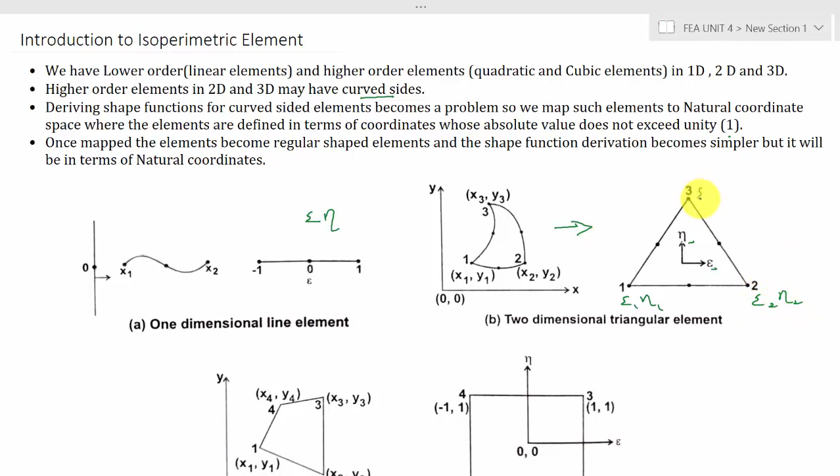This is actually my curved surface, that is the isoparametric surface. I have converted this Cartesian coordinate system into a natural coordinate system, so your lines will be straight lines, but here the coordinates are eta and nu. So this is eta1, nu1, this is eta2, nu2, and this is eta3 and nu3, not x and y system.

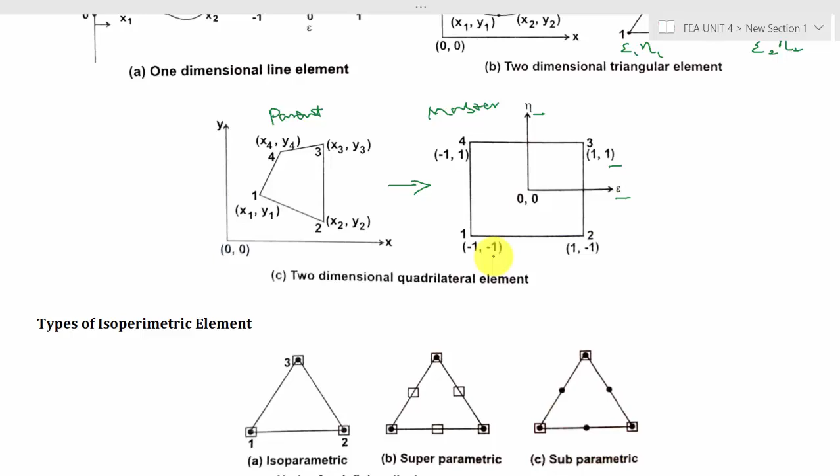Similarly for the two-dimensional quadrilateral element, this is the Cartesian coordinate system, or the parent element, and I am converting the parent element into a master element in natural coordinates eta and nu. You can see that the maximum value will be +1 and the minimum value will be -1. So this is called isoparametric formulation.

There are three types of isoparametric elements: one is isoparametric, the second one is superparametric, and the third one is subparametric.

In isoparametric, the shape functions are used to identify both the displacements as well as geometry. In previous elements, we used the shape function to identify the displacement alone, but in isoparametric element, the shape function identifies both displacement and geometry. So the nodes for defining the displacement is equal to the nodes for defining the geometry.

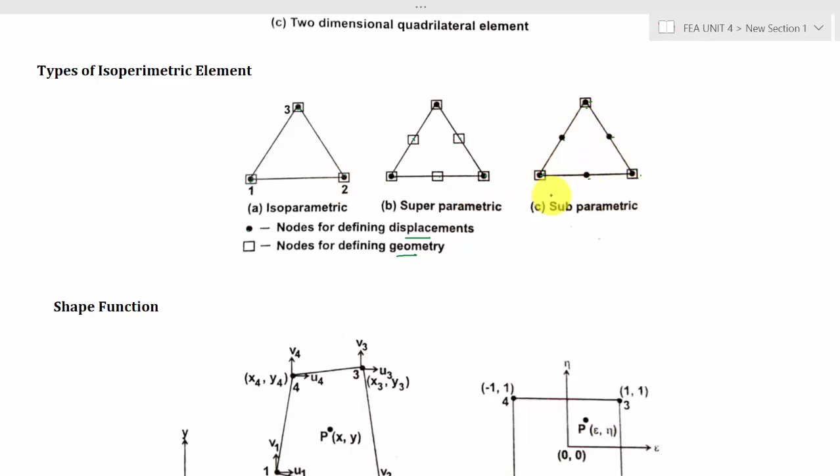In superparametric, the nodes for defining the geometry is greater than the nodes for defining the displacement. The dot is a node for defining displacement, and the square is a node for defining geometry. When you go for subparametric, we have 3 nodes for defining the geometry, and 6 nodes for defining the displacement. So this is the difference between the three isoparametric elements.

Now coming to the shape function, here I have considered a general quadrilateral element, that is my parent element. I am converting the parent element into a master element, that is the isoparametric quadrilateral element in natural coordinates eta and nu. So here these are all my shape functions. Since I have 4 nodes, I will have 4 shape functions.

N1 is equal to 1 by 4, 1 minus eta, 1 minus nu. At node 1, the eta value and nu value will be -1, that is why you have minus and minus here. At node 2, eta is +1 and nu is -1, so eta is plus and nu is minus. At node 3, both eta and nu values will be positive. At node 4, eta is negative and nu is positive. So these are all the 4 shape functions.

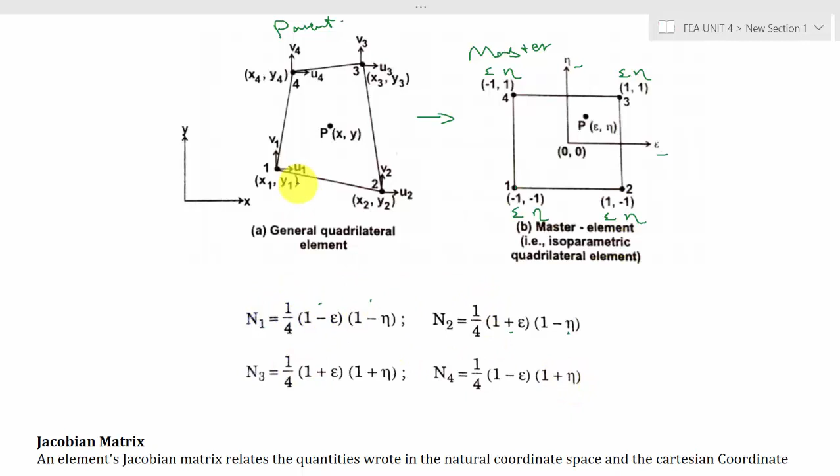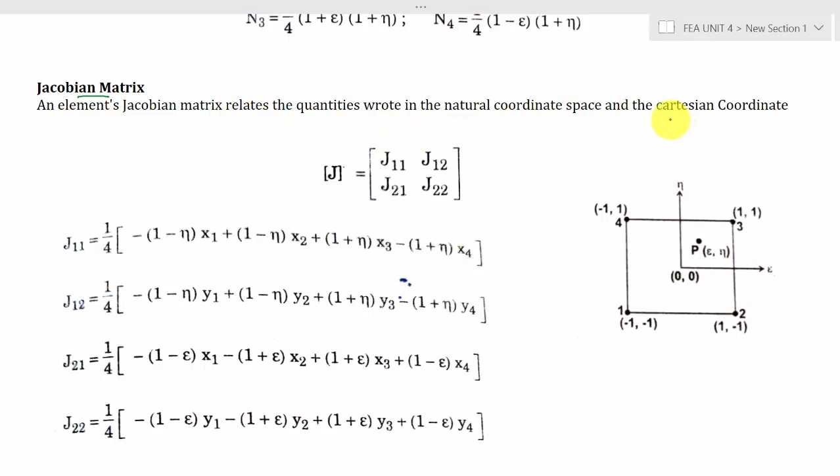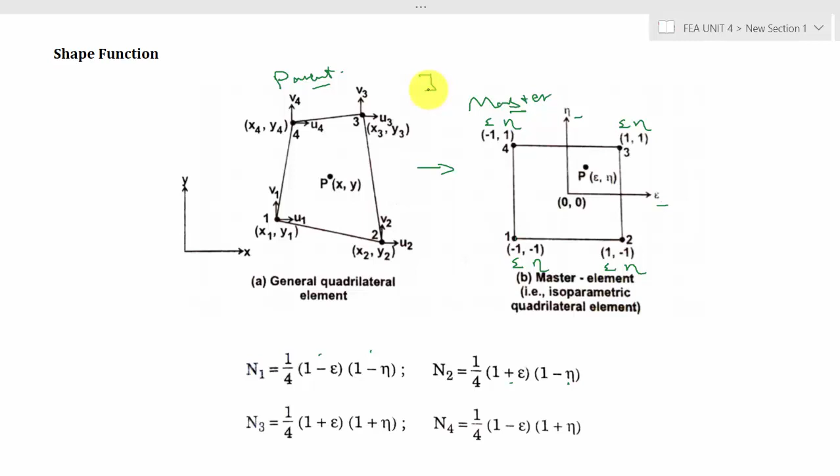Then the next matrix is the Jacobian matrix. This is a new term. The Jacobian matrix relates the natural coordinate system with the Cartesian coordinate system. It gives the relationship between the master element and the parent element. So J is the relationship between these two elements.

The equation for the J matrix is J11, J12, J21, J22. Here is the equation: it is 1 by 4 times minus 1 minus nu times x1, plus 1 minus nu times x2, 1 plus nu times x3, 1 plus nu times x4. So J11 and J12 will be in nu, J21 and J22 will be in eta.

Here also you can use the same principle. At node 1, eta and nu both are minus, so you move from 1, 2, 3, 4. Node 1 is minus minus, node 2 is plus minus, node 3 is plus plus, node 4 is minus plus.

Then J11 can be replaced by J12 if you replace x with y in the same equation. Then when you go for J21, you have to move in the opposite direction. For J11 we moved from 1, 2, 3, 4, that is the counterclockwise direction. Here you have to move in the clockwise direction, so it is minus minus, then minus plus.

Here you can see it is minus plus, then plus plus, then again plus minus. Here it is x, here it is y, write it in the anti-clockwise direction, clockwise direction. If it is x, then it is J21, if it is y, then it is J22. So this is how you can remember the Jacobian matrix equation.

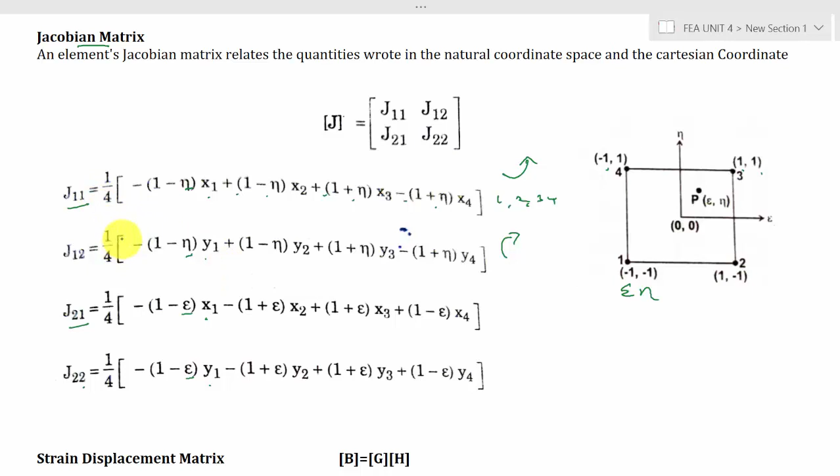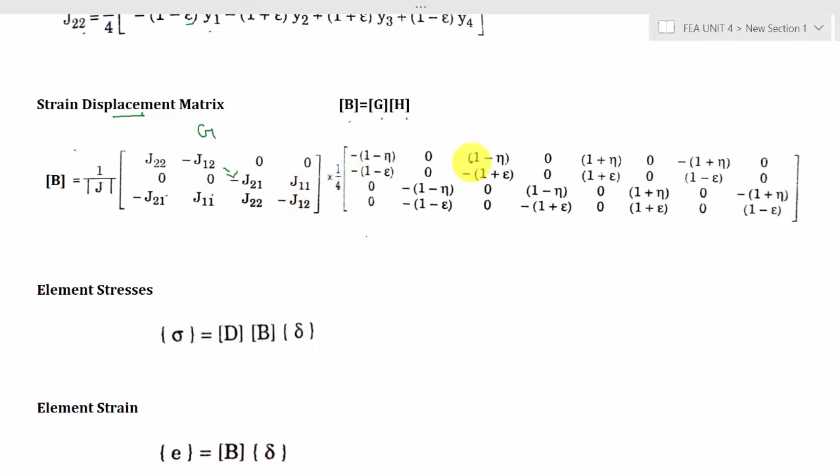Then the next matrix is strain displacement matrix. B is equal to G into H. The G is, this is the G matrix. It is 1 by modulus of J, J22 minus J12, 0, 0, 0, 0, minus J21, J11. Then write it here J21, J11, then J22 and minus J12. And here into 1 by 4, this is actually your Jacobian matrix. It is almost like your Jacobian matrix.

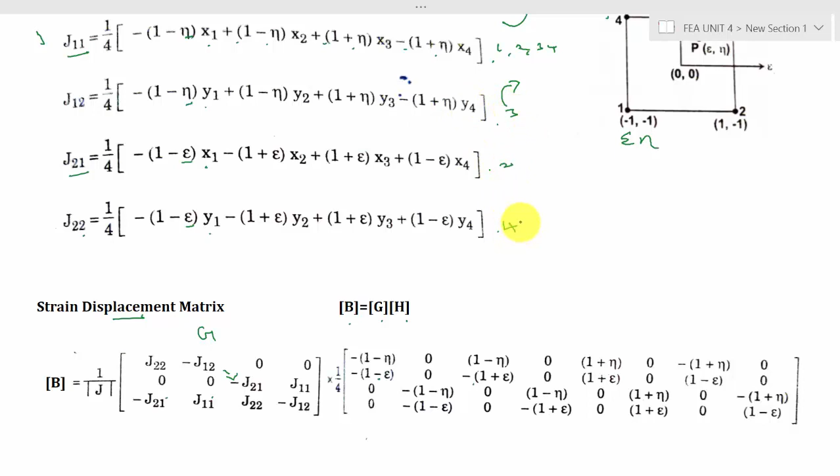You can see that minus 1 minus eta 0, then 1 minus eta 0, then 1 plus eta 0, minus 1 plus eta 0. First row, then second row, third row and fourth row. So this is how you can remember this B matrix equation.

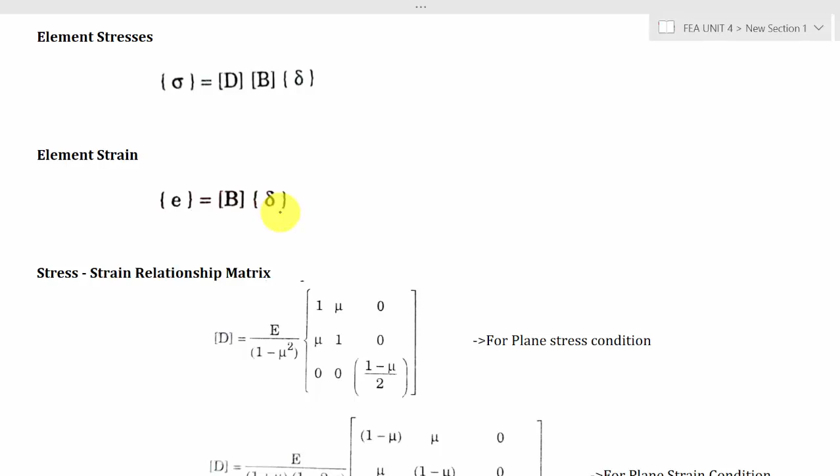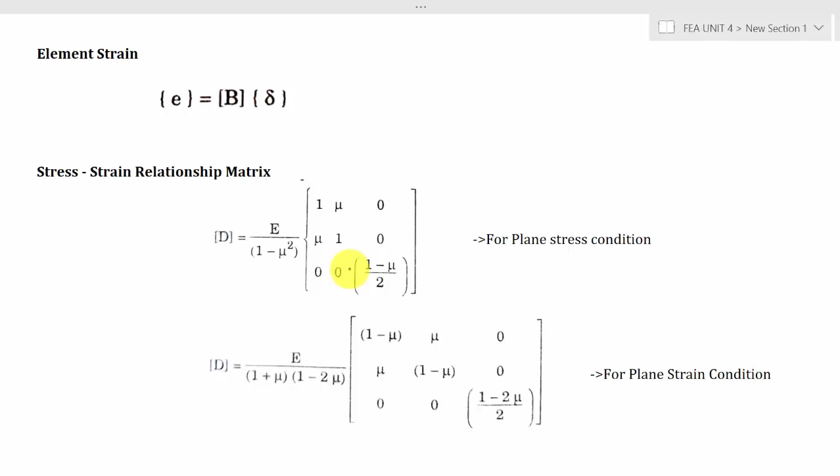Then the element stress equation is common. Sigma is equal to dB into del. For element strain it is E is equal to B into del. So for the D matrix we have two conditions: one is plane stress condition as well as plane strain condition. This equation is same for all, like the CST element. You can refer that. Here E is the Young's modulus and mu is the Poisson ratio.

So mostly in the problems they will ask you to calculate the Jacobian matrix, strain displacement matrix, or sometimes they may ask you to calculate the sigma and E. So this is my first problem.

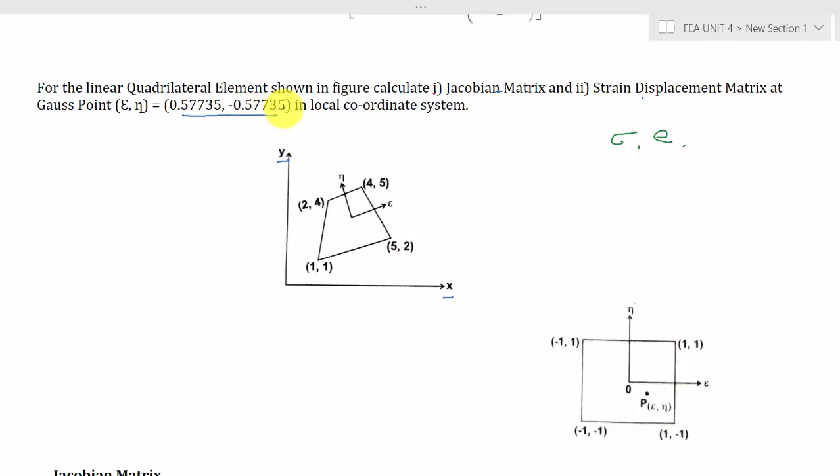For the linear quadrilateral element shown in figure, calculate Jacobian matrix, strain displacement matrix at Gauss point. So actually here the element is given in x and y, that is Cartesian coordinate system. But we have to find out the Jacobian matrix and strain displacement matrix at the Gauss point, that is epsilon is 0.57735 and eta is minus 0.57735. So here I have converted this into my natural coordinate system with epsilon is 0.577 something and eta is minus 0.57735.

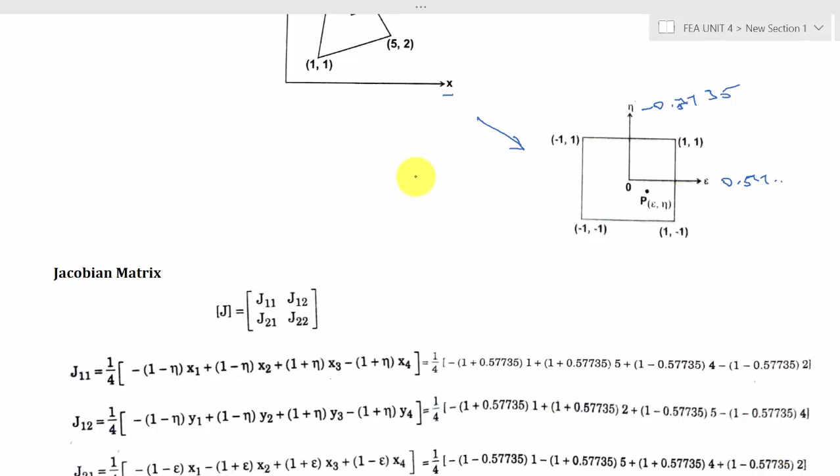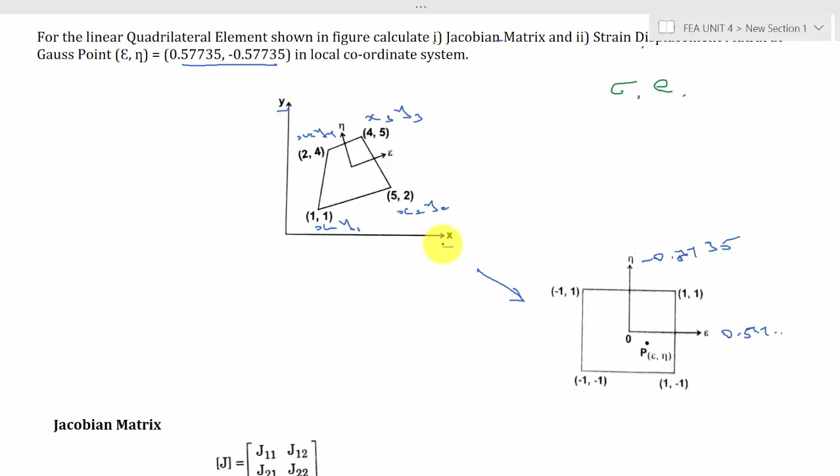So first we'll calculate the Jacobian matrix. The equation for Jacobian matrix is J11, J12, J21 and J22. So now I have written the equations. Here epsilon we know, eta we know, x1, x2 is given in the problem. So here it is x1, y1, x2, y2, x3, y3 and x4, y4, because it is given in the Cartesian coordinates. So you can substitute it.

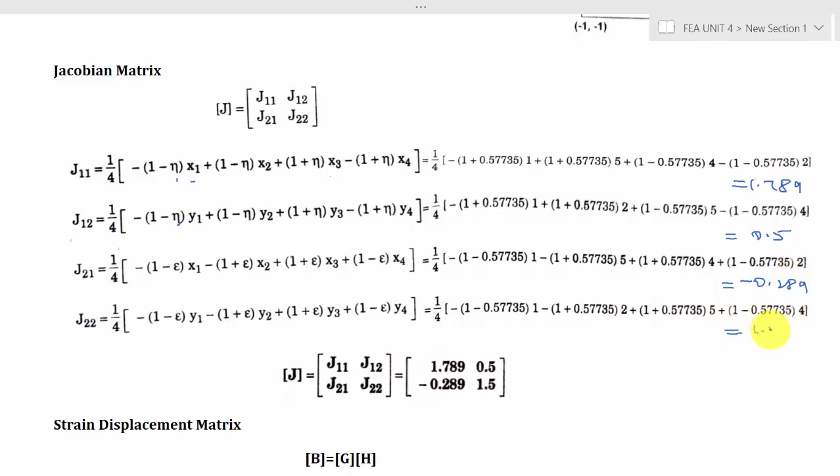So the value for J11 is 1.789, and for J12 it is 0.5. For J21 it is minus 0.289, and J22 is 1.5. So this is my Jacobian matrix.

The next one is strain displacement matrix. B is equal to G into H. So this is the G equation. Here modulus of J is there. So I have already calculated the J value. You can use the determinant of J in your calculator and find out the J value. And also we have the values for J11, J12, J21 and J22. So you can substitute everything here.

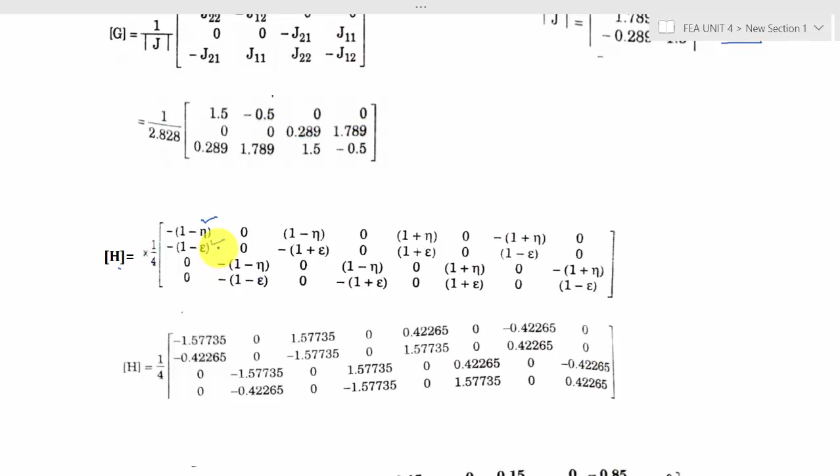And this is the H. So we know the formula. You can substitute the value of epsilon and the value of eta. Once after calculating the G matrix and H matrix, you can multiply them together because we know that B is equal to G into H. So we have the G matrix and we have the H matrix. You can multiply it and find out the B matrix, that is strain displacement matrix.

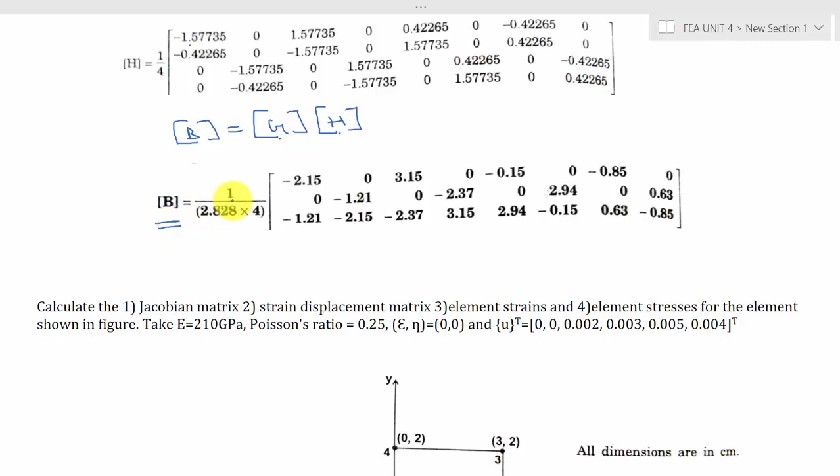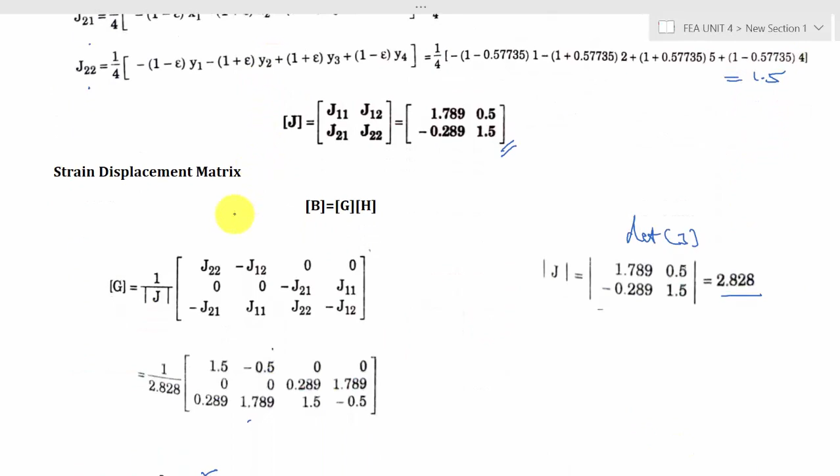So here the thing is you have to remember this equation. That's the main problem. So you have to remember the equations for Jacobian matrix, then strain displacement matrix. That is very important.

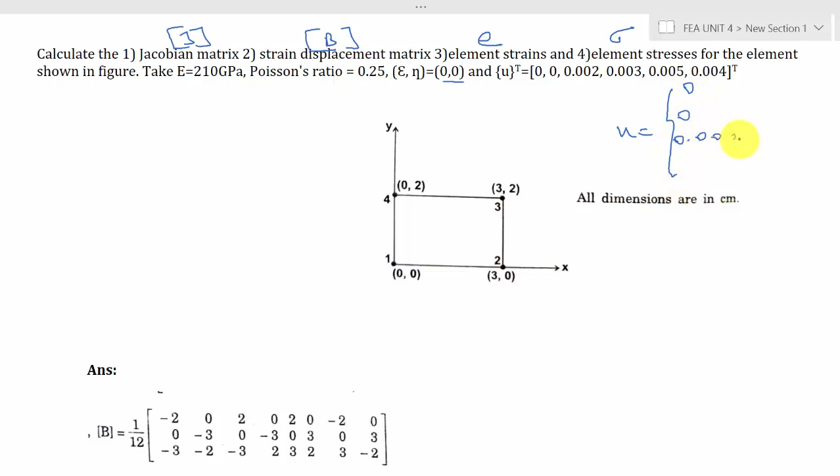The tutorial problem is calculate the Jacobian matrix, strain displacement, so this is J matrix, then B matrix, element strains E and the element stresses for the element shown in figure. E is given, mu is given, epsilon and eta is 0, 0 and the u is given. So this is the u vector: 0, 0, 0.002, 0.003, 0.005 and 0.004, because it is given in transpose.

So you can transpose it. And this is the given element. Here all the coordinates are given in centimeter. Better you can convert it from centimeter to mm.

So you can calculate the J matrix, B matrix. Further E, we know that the equation for E is equal to B into del. So here the del is given, that is displacement. So in some textbooks they may follow del, in some textbook they may follow U. So don't confuse about it.

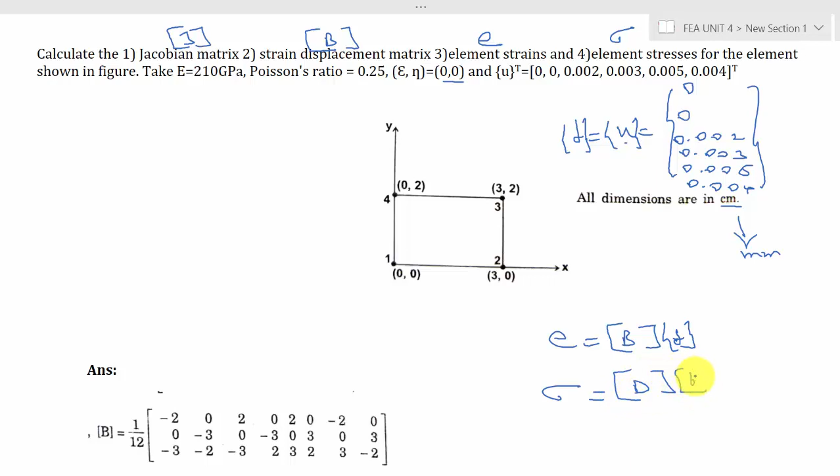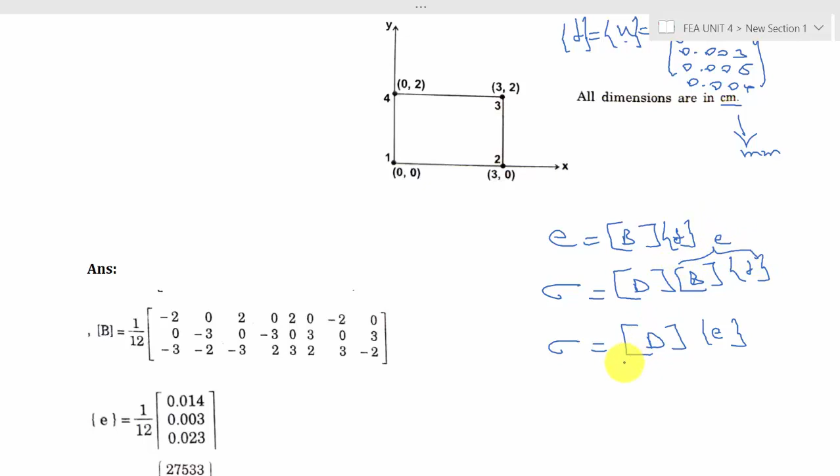Then the fourth one is element stresses. So sigma is equal to D into B into del, or otherwise once if you calculate the strain initially, then you can write like this: sigma is equal to d into E, because this B into del is same as the E. So you can use this equation also to find out the stress value.

So these are all the calculated answers. This is my B matrix, this is strain and this is my stress. So the answer is in Newton per centimeter square. So you can refer that.